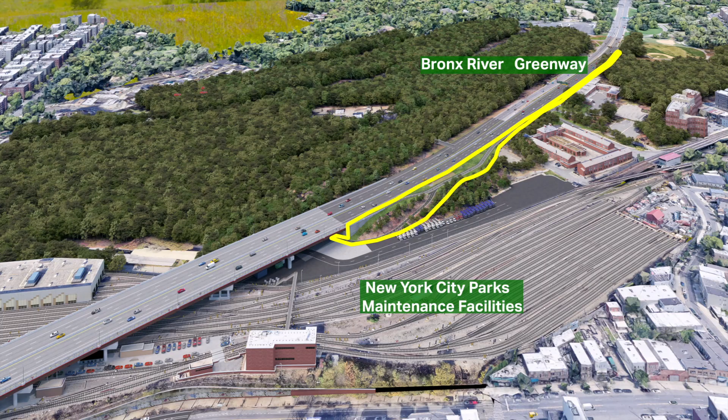The New York State Department of Transportation is continuing its commitment to improve the Bronx River Parkway for the traveling public. The replacement of 2 Bronx River Parkway bridges, with safety and mobility improvements between East Tremont Avenue and Bronx Park, will be a comprehensive 21st-century replacement and improvement of the East Tremont Avenue Bridge and Viaduct, roadways, shared use path, and the New York City Parks and Recreational Facility and NYPD Highway Patrol Unit facility access. The work will include upgrades to the Bronx River Greenway and New York City Parks maintenance facilities.

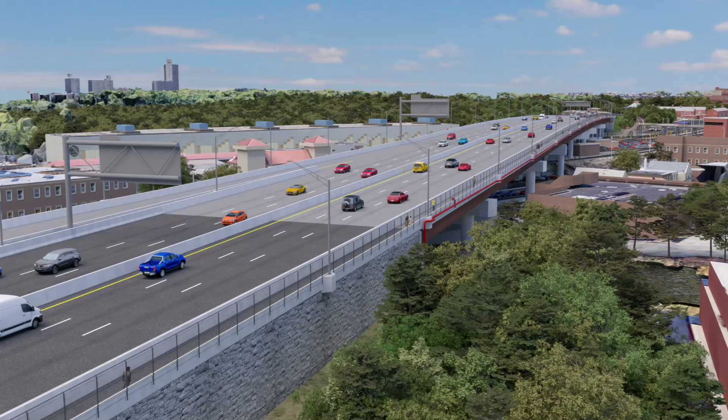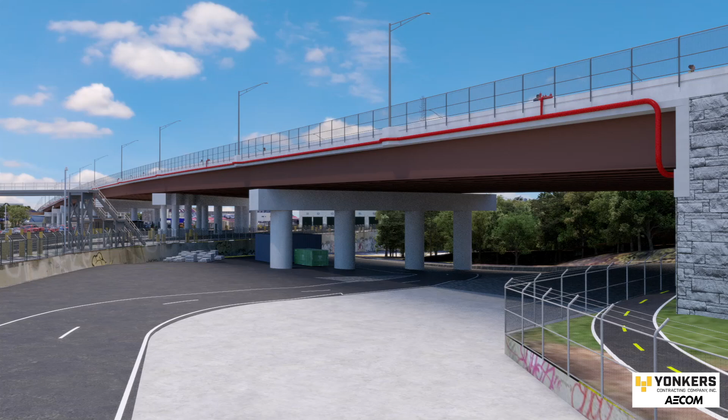The Yonkers AECOM Design Build team understands it will take significant planning, innovative design, and construction methods to execute a successful design build delivery. This assembled team brings the necessary knowledge, skill, and design build experience to execute this challenging project. The Yonkers AECOM Design Build team culture will be rooted in communication, collaboration, and coordination, the 3 C's, with all applicable stakeholders to achieve a successful outcome.

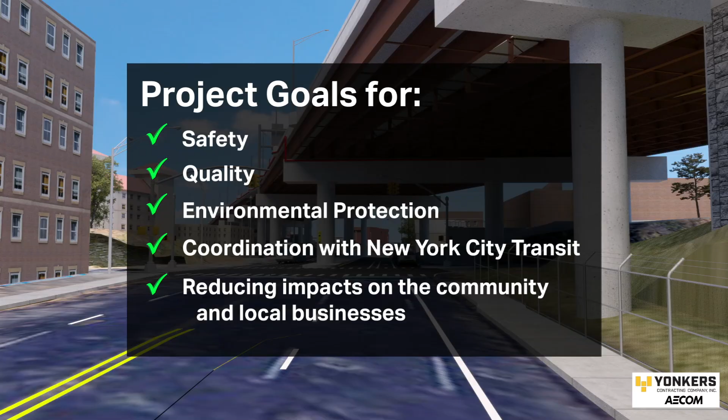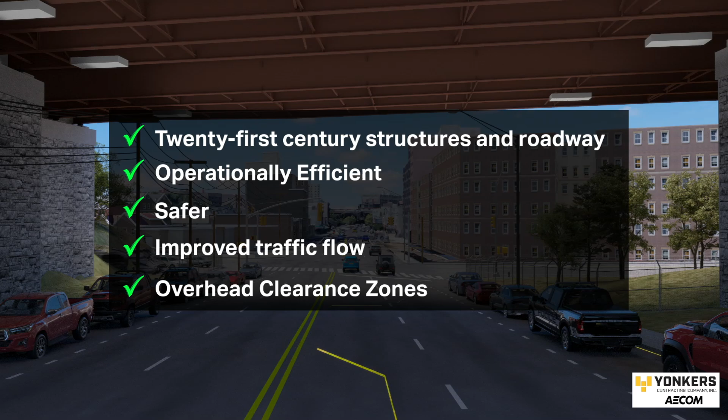The Yonkers AECOM Design Build team will exceed the key project goals for safety, quality, environmental protection, coordination with New York City Transit and third parties, and reducing impacts on the community and local businesses. When completed, the Yonkers AECOM Design Build team will deliver 21st-century performance structures and roadways that are operationally efficient and safer, with improved traffic flow and overhead clearance zones. The team will incorporate innovative design solutions, approved ATC resilient materials, and high-quality construction that will translate into a long service life with minimal maintenance for the department.

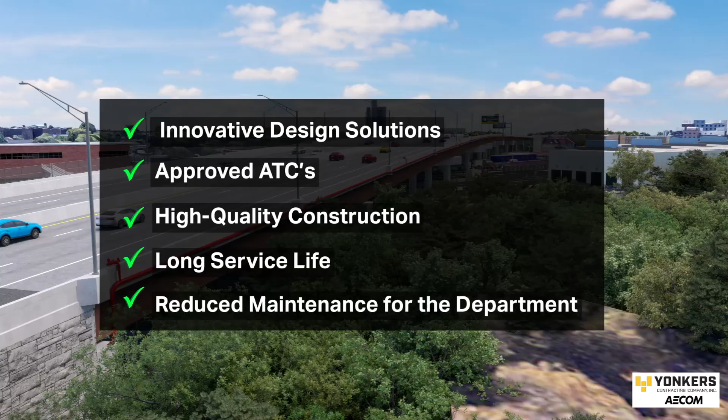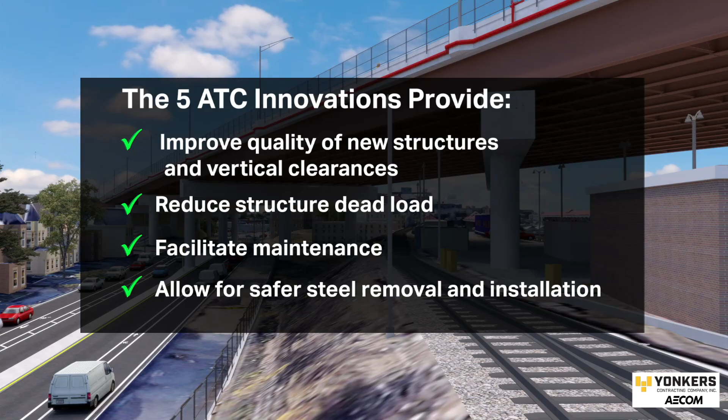The Yonkers AECOM Design Build team has developed a design and construction approach that minimizes disruptions to existing traffic, the New York City Transit Service, Operations and Maintenance Facility, New York City Parks and Recreation, and NYPD Highway Patrol Unit 1 facilities. This approach utilizes girder launching and incorporates 5 innovative ATCs to meet the project goals. These 5 ATCs will improve quality of new structures and vertical clearances, reduce structure deadload, facilitate maintenance, and allow for safer steel removal and installation.

In particular, ATC 8 greatly simplifies the project by allowing demolition and reconstruction of the structures and approaches in 3 stages, rather than 4 as shown in the RFP. This also improves structural integrity, reduces long-term maintenance, and simplifies work zone traffic and construction over the New York City Transit Yard.

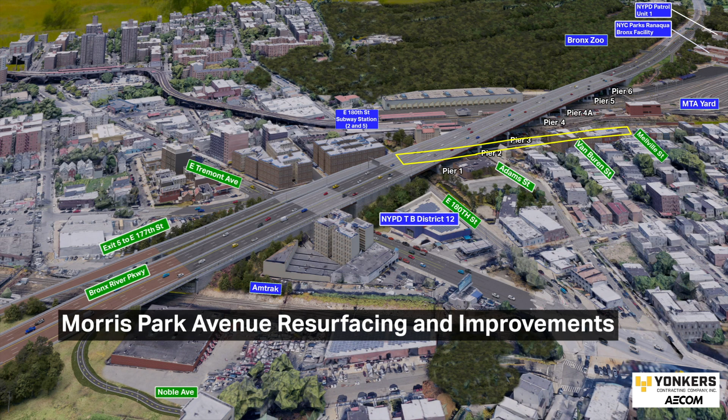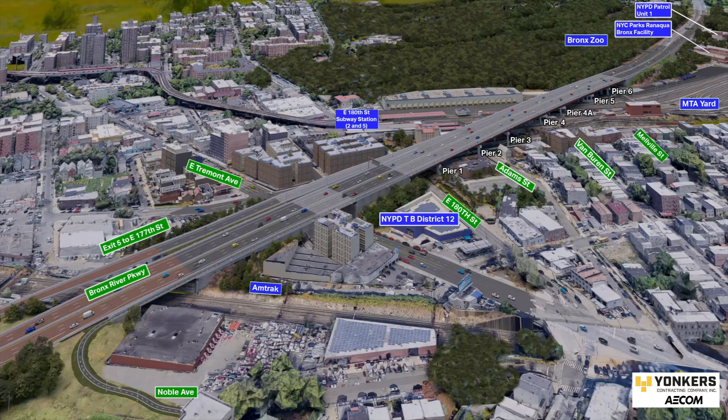3 blocks of Morris Park Avenue will be resurfaced with asphalt pavement, concrete median islands, and some curb and sidewalks with ADA curb ramps, traffic and pedestrian signals, street lighting and pavement markings from the intersection at East 180th Street to the intersection at Melville Street. 4 additional facilities will be replaced and improved in this project.

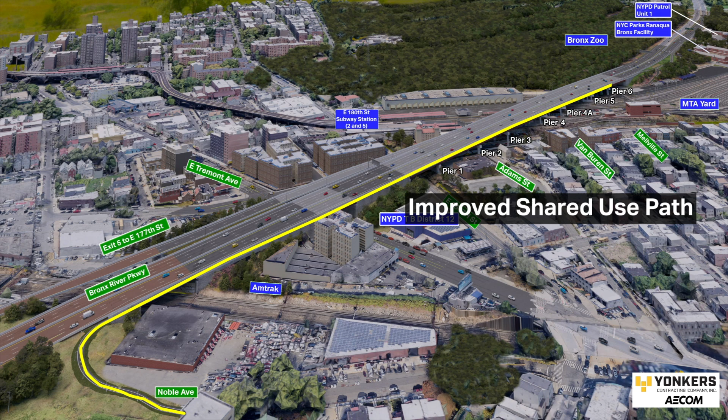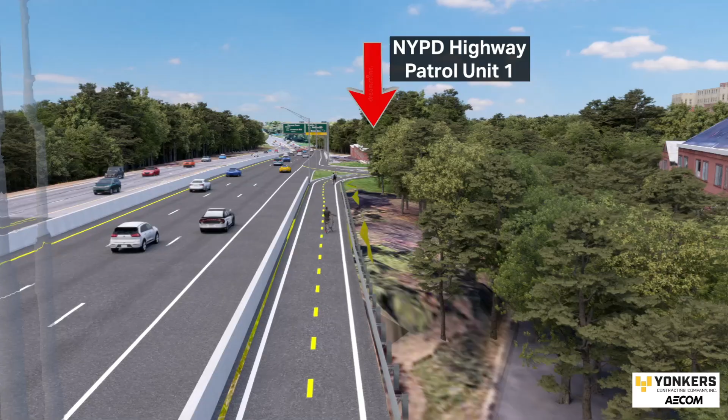An improved shared use path will be built to connect the existing shared use path at the Noble Avenue/Bronx River Avenue intersection to the Bronx River Greenway north of the viaduct. The Bronx River Greenway will be upgraded and realigned north of the viaduct, and pavement improvements will be installed in the NYC Parks maintenance yard. Sagamore Street will be extended to the west to provide new access to the NYPD Highway Patrol Unit No. 1 parking lot.

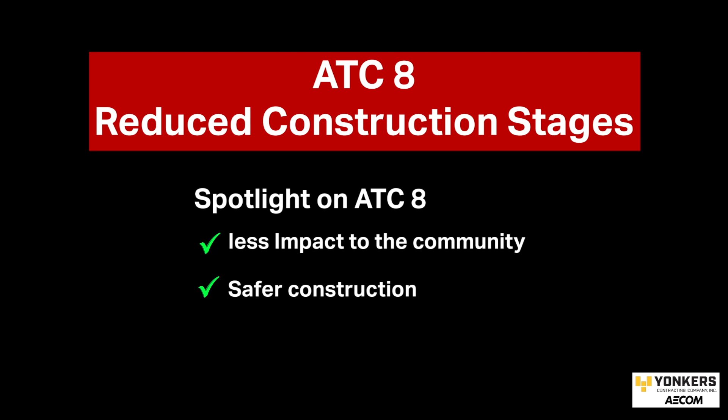Our innovative ATCs offer the following benefits. ATC 8, reduced construction stages. This ATC achieves the demolition of the existing viaduct and bridge and the construction of the new viaduct and bridges in 3 stages rather than 4 stages. This reduces the traffic impacts on BRP, maintaining 3 lanes of northbound and southbound traffic in all stages without cattle chutes during peak travel periods.

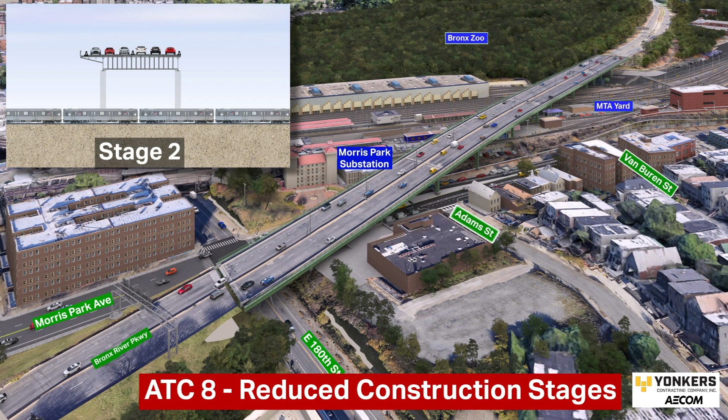This ATC eliminates high-risk construction and operations impacts of temporary longitudinal strongback beams, with substantial temporary foundations and piers in the New York City Transit Rail Yard, Morris Park Avenue, and New York City Department of Parks and Recreation property that would be required to support the west half of the existing viaduct for live traffic when the existing eastern column line and longitudinal girders are removed in the RFP 4-stage construction.

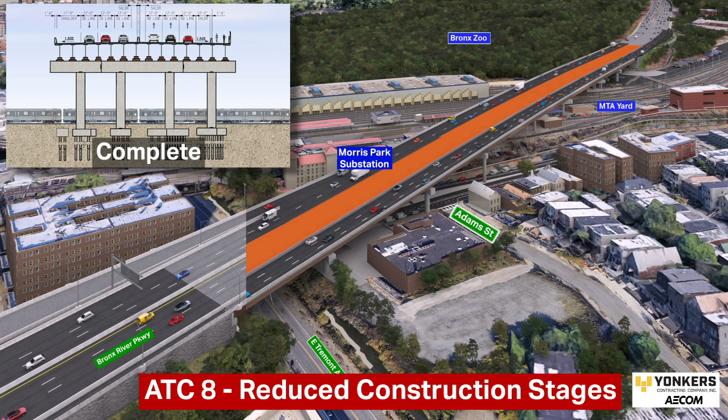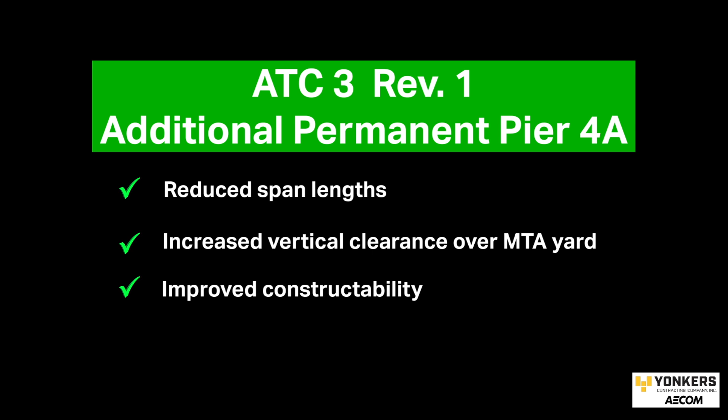The 3-stage construction scheme allows deck and both existing column lines and longitudinal girders to be removed efficiently and productively in a single stage, which results in reduced demolition, schedule, and cost risk. ATC 3 Revision 1, Pier 4A.

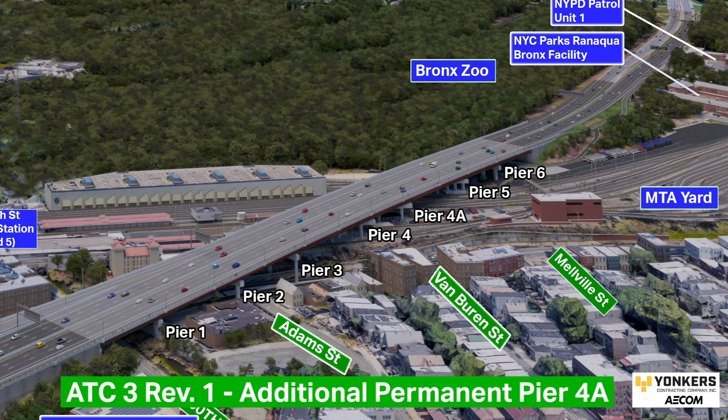ATC3 Revision 1, Pier 4A: the introduction of the additional permanent Pier 4A in the New York City Transit Yard reduces the length of span 5 from 400 feet to 260 feet, which results in a major reduction in the depth and weight of the girders.

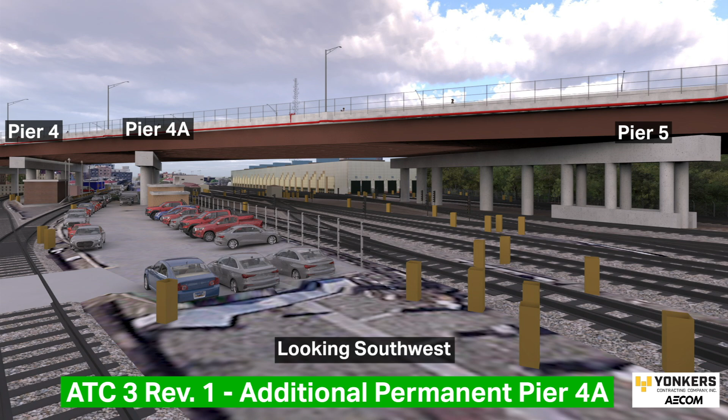The 400-foot RFP span required 11-foot deep girders weighing approximately 1,000 pounds per foot that have massive uplift forces at the south end of Unit 2, at the west end of Pier 3, that required significant counterweight of about 500 cubic yards of concrete encasement. This ATC allows a reduced girder size to 8 foot 6 inches deep and weighing approximately 550 pounds per foot with no counterweight concrete needed.

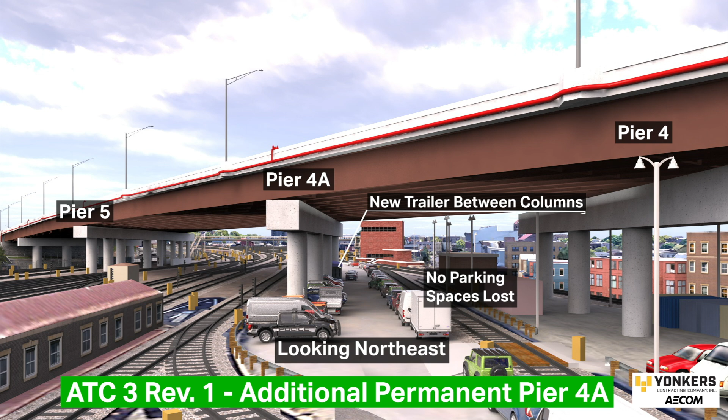The shallower girder depths also create an additional 2 feet 6 inches of vertical clearance over the New York City Transit Yard and New York City Department of Parks and Recreation properties and New York City streets.

ATC4, HPS-70 steel. This ATC provides greater girder strength and resiliency and reduces long-term maintenance requirements. The HPS-70 steel also assists in reducing the depth and weight of the girders, which will facilitate the girder launching operations.

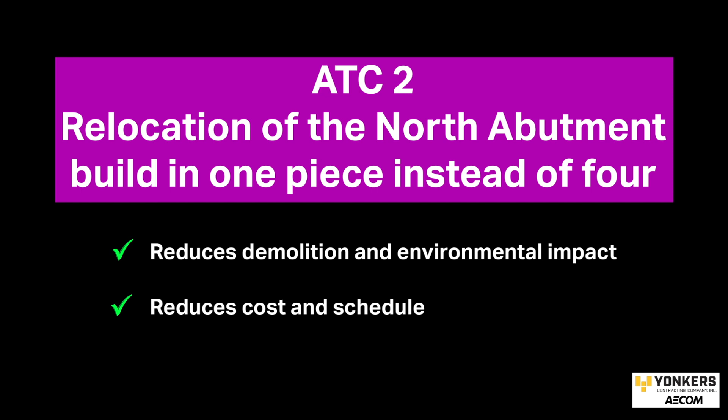ATC2. Relocation of the north abutment provides for the new north abutment to be constructed in front of the existing north abutment that will be left substantially in place, reducing demolition noise and debris, trucking, environmental impacts, cost, and schedule.

This ATC will allow the sequence of the abutment construction to be done early in the project, with the footing and the stem and wing walls to be built monolithically without stage construction joints, thereby improving quality.

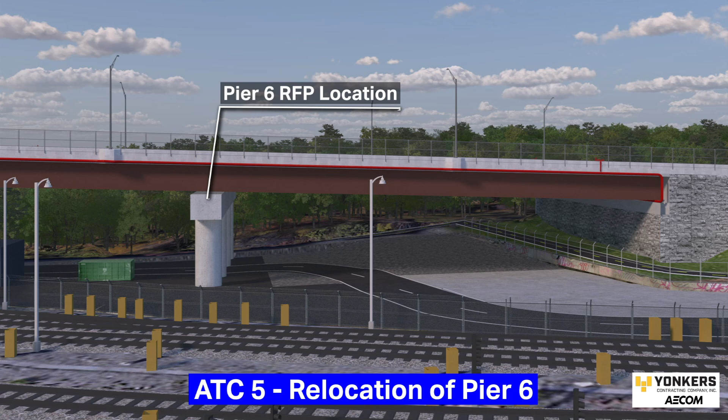ATC5, Pier 6 relocation. This ATC shifts Pier 6 south by the same distance as the north abutment is shifted south in ATC2. The length of span 6 is reduced by 12.5 feet, thereby reducing future maintenance over the New York City Transit and New York City Department of Parks and Recreation yards.

In Stage 1, the Yonkers AECOM Design Build team will remove existing median and roadside barriers and place temporary pavements required for the Stage 2 work zone lane arrangement. Next, the travel lanes will be relocated to the west and reduce lane width to 10 foot 6 inches. This will provide a 15-foot work zone to begin construction of the eastern section of the bridge.

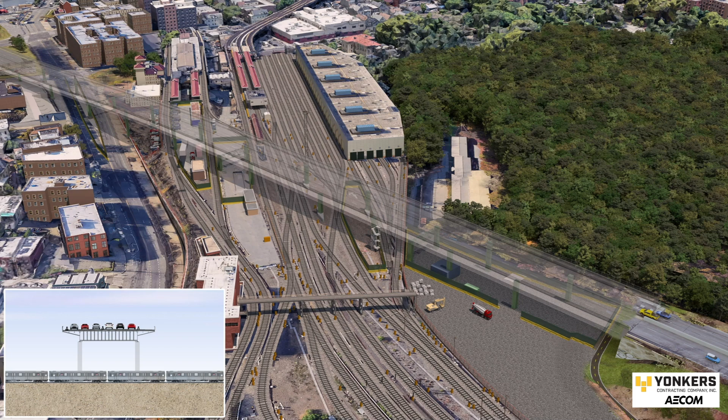The Yonkers AECOM Design Build team will set up the construction containment areas and establish access in the MTA yard. This will include a chain link fence on top of temporary concrete barrier around the work zone perimeters. Entrance and driveway access will be from 180th Street to transport materials without impacting train operations.

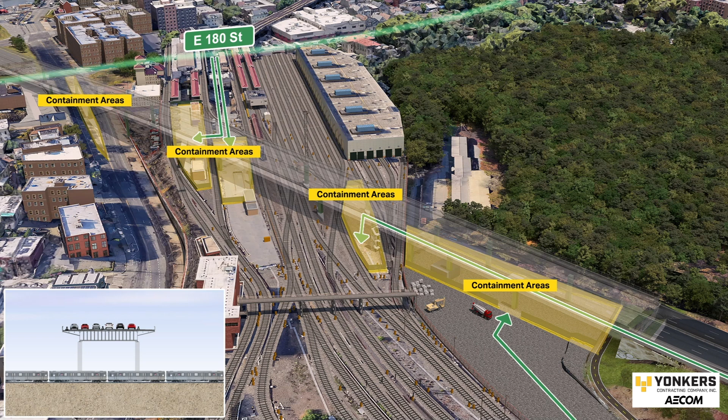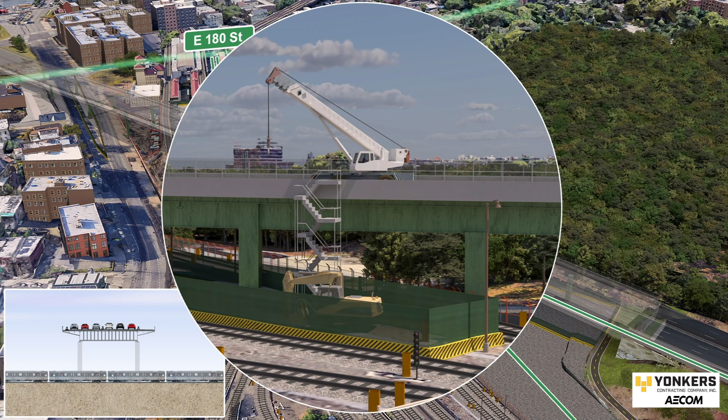The Yonkers AECOM Design Build team will perform construction operations inside the containment area to the greatest extent possible to reduce the need for track outages. Construction at Pier 5 will require direct access for deliveries and crews from the existing viaducts, closed lanes, and stair towers. Parking spaces in the MTA yard for employees will be maintained. Their access from 180th Street for the project duration will be maintained.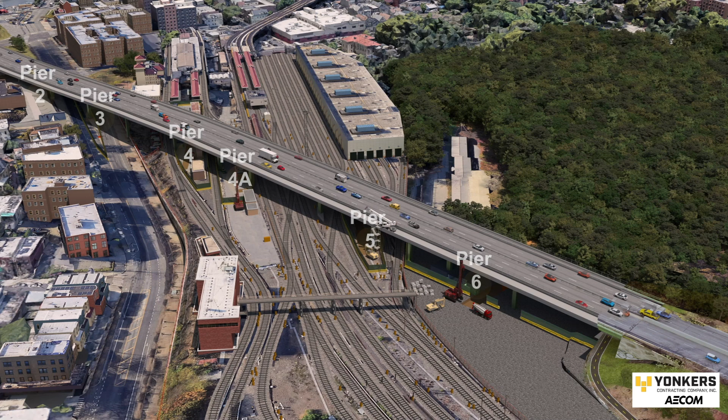Stage 2. Work will continue constructing the piers and will be completed in phases that will match the bridge construction scheme. All of the work with the lanes shifted to the west and narrowed to 10-6 is being performed in Stage 2. Excavation and micropiles will be driven at each pier location. Foundations are then poured and piers erected.

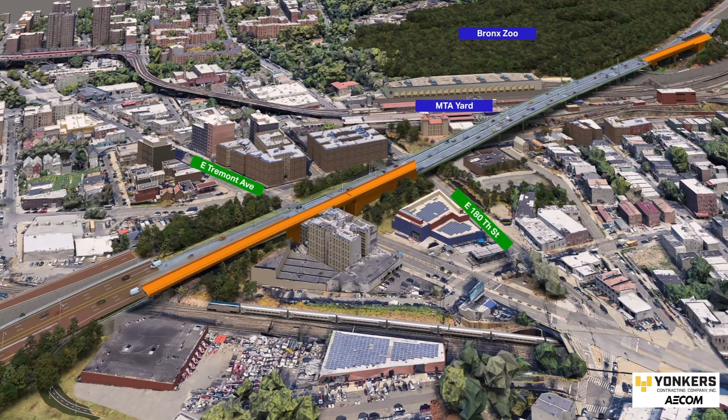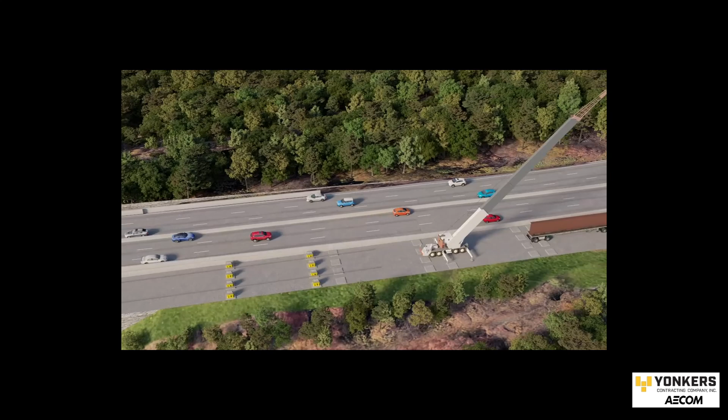The launch bay will have temporary supports and launch rollers for the first girder assembly. A crane will lift and place girder segments on the rollers for the launch. 4 launch nose girders will be assembled to the leading edge of the launch girder set. Each girder segment will be spliced together with space for rollers to operate unobstructed.

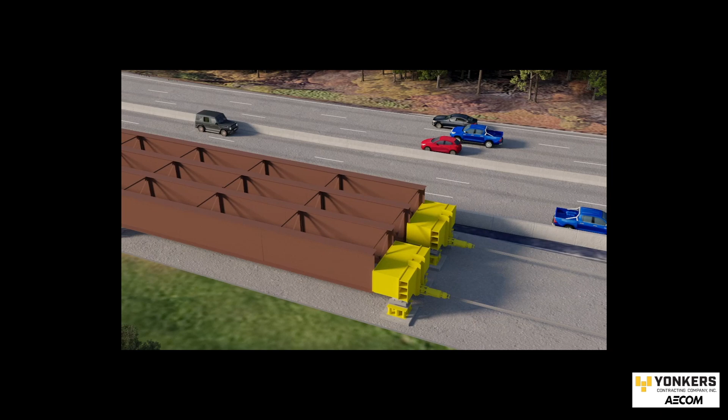The full length of the girder segment will be 450 feet. The segments will be held together by diaphragm. A pair of Enerpac strand jacks will be used to pull the assembly using a 19-strand cable anchored at the

north abutment wall. We will coordinate with Metropolitan Transportation Authority, MTA, and New York City Transit, NYCT, to close down movement on tracks under girder launch zones. The first tracks to close will be 11 through 16 during daytime hours.

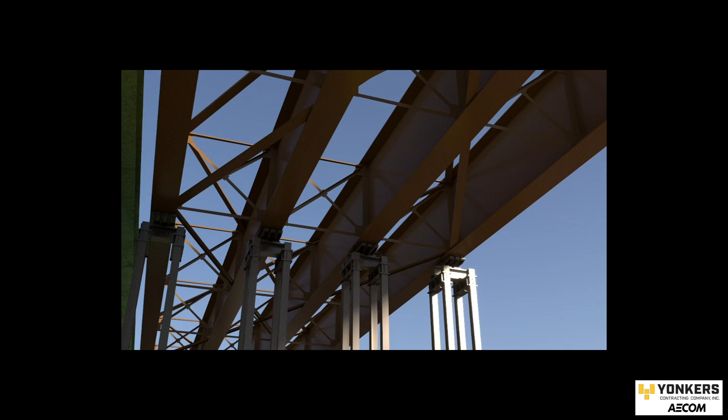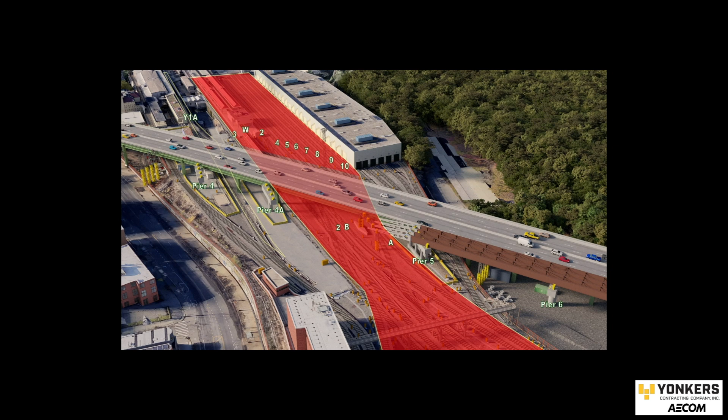Once the initial 450-foot girder assembly reaches Pier 5, the team will begin assembling the 575-foot girder assembly behind it and launch both segments together until they reach Pier 3. This innovative approach will eliminate cranes on the MTA properties and reduce impact to New York City subway operations.

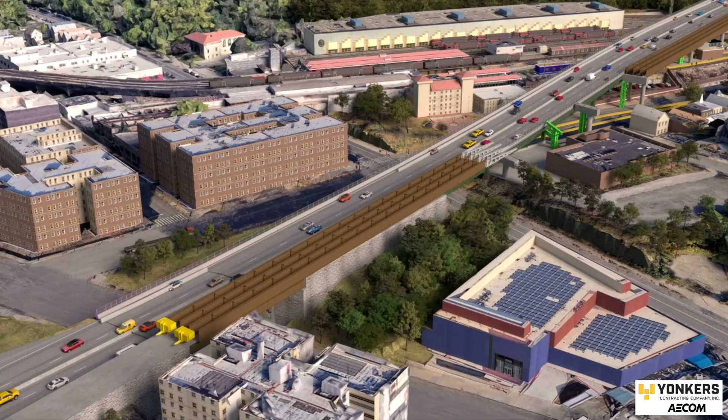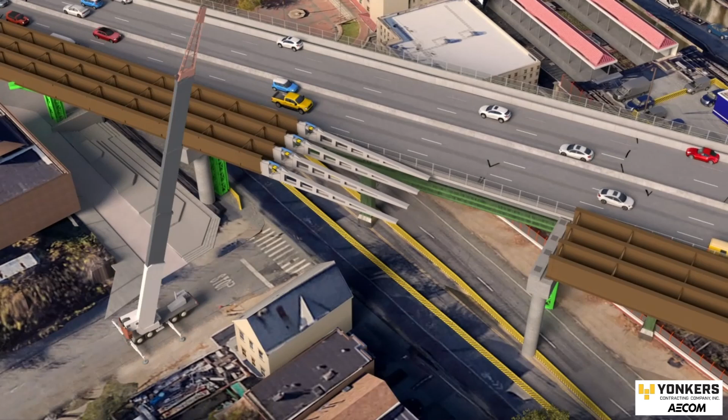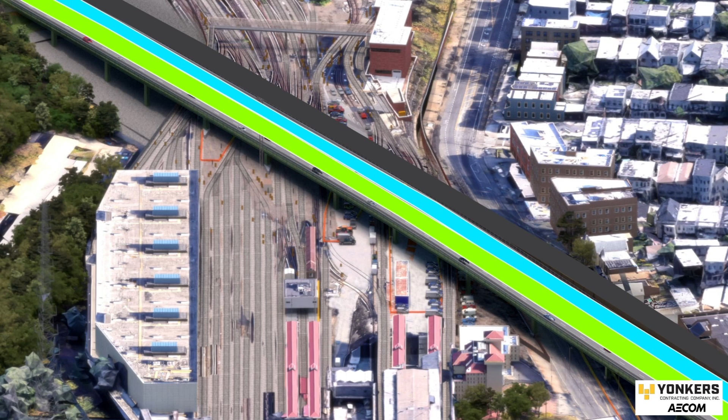The final girder set will be set using a crane and spliced together with the previously launched segments. Three lanes of northbound traffic will now be moved to the newly constructed bridge, and the 3 southbound lanes will be moved to the east side of the existing bridge.

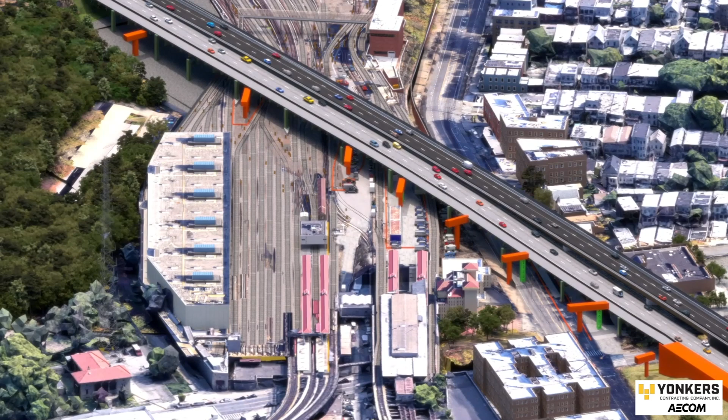Stage 3. Work will now shift to the construction of the piles, foundations, and piers that are needed for Stage 3. Also, temporary piers will be used to hold the pier caps until Stage 4 is completed. The launch bay area at the north abutment will be prepared. Assembly and launching of this segment will follow the same sequence as Stage 2.

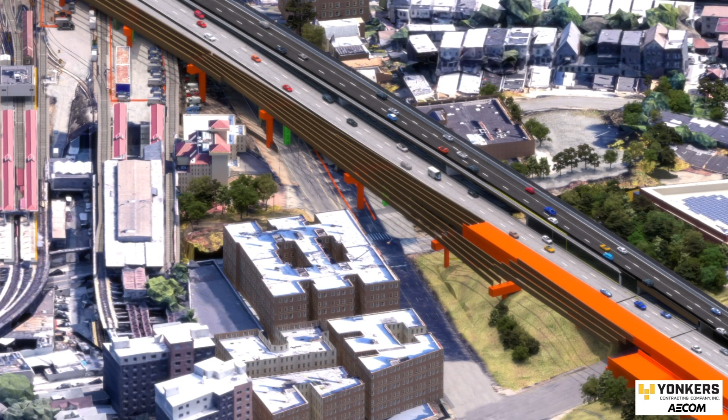The remainder of the southbound spans will be constructed using conventional method using cranes from the surface streets. Concrete deck surface, barriers, and dry stand pipe system will be installed. Southbound traffic on the existing bridge will now be moved to the newly completed bridge.

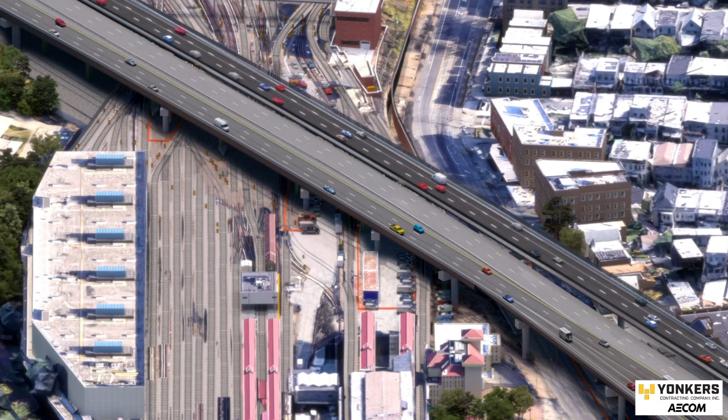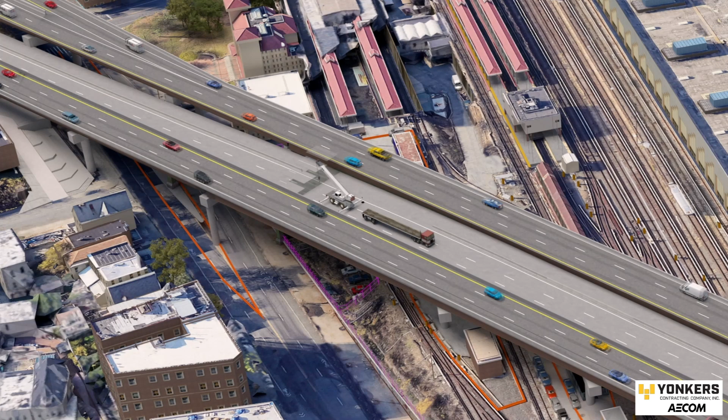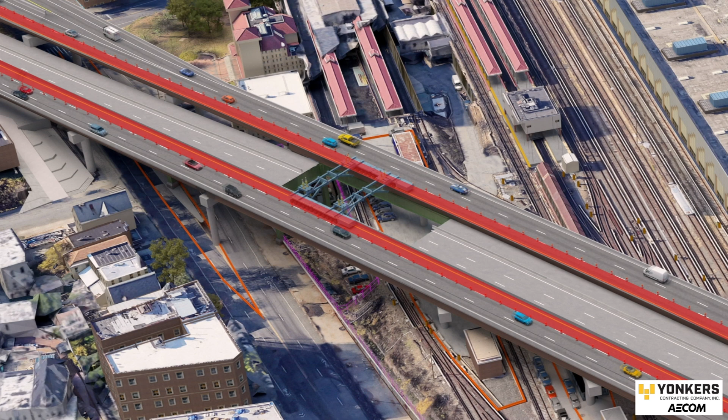Stage 4. The existing steel floor beams and girders will be removed with extreme care to ensure stability during demolition. The steel pieces will be cut into smaller pieces for off-site disposal. A mobile gantry crane will be used for removal of the major structural steel components of the existing viaduct.

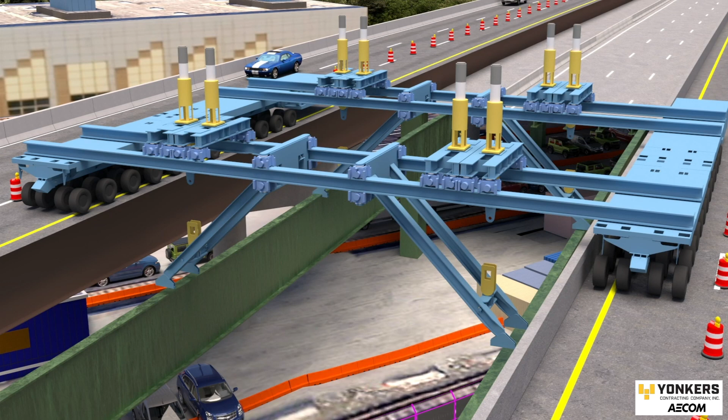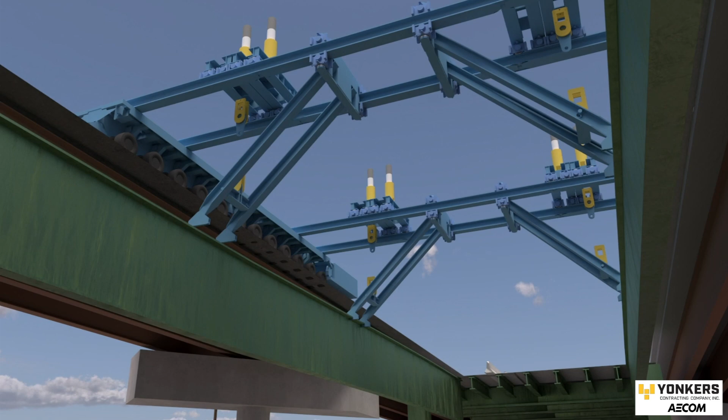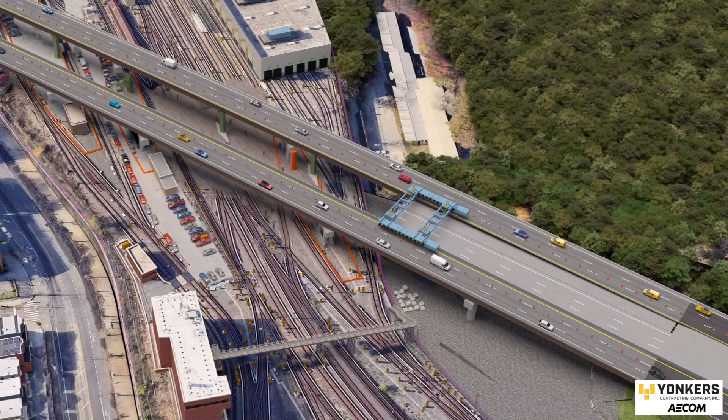This mobile gantry is comprised of 2 self-propelled mobile transporters, spaced about 60 feet across from each other and connected with engineered gantry steel beams and hoisting equipment. This efficient and innovative equipment will have more than enough capacity to handle the existing main girders that weigh about 900 pounds per foot. The transporter will walk back and repeat the lifting operation span by span unit until all floor beams, girders, and columns are removed.

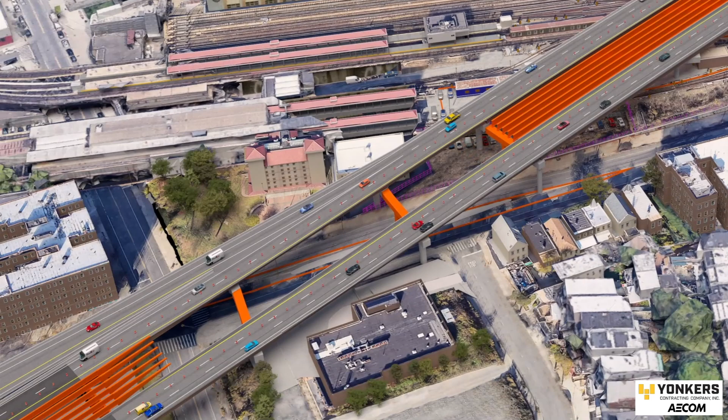The remaining portions of the piers will be constructed using the same work zones from previous stages. An abutment will be constructed as well as the remaining portions on the south end that includes the bridge over Tremont Avenue. Assembly and launching of this segment will follow the same sequence as Stage 2 and 3. The launch bay area will be prepared at the south abutment area. Assembly and launching of this segment will follow the same sequence as Stage 2.

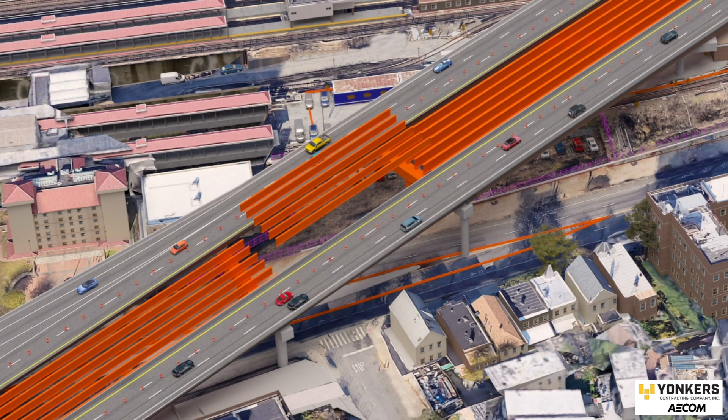The remaining last span will be built using conventional method and assembled from the new bridge deck. Closure pours and final details are completed to provide the shared use path. Final lane striping is completed, and all traffic will now be placed in the final location.

The Yonkers AECOM Design Build team has developed an innovative approach that will deliver 21st century improvements to the Bronx River Parkway and surrounding facilities. Our team brings knowledge, skill, and experience necessary to deliver this challenging project and a proven approach that will satisfy stakeholders and exceed the department's goals.